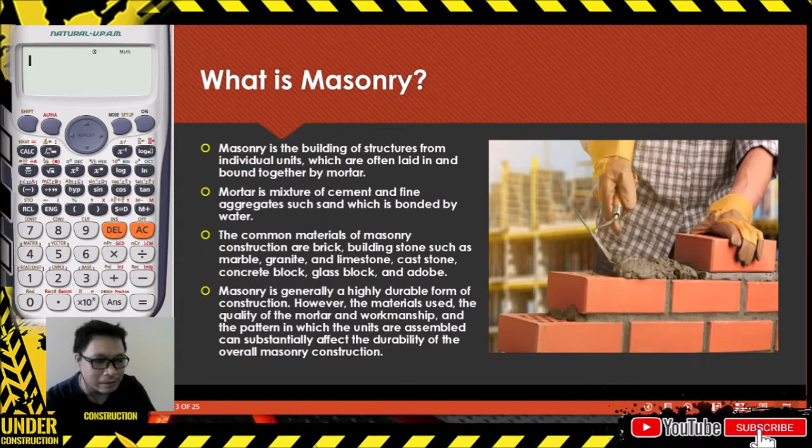Next question: why use concrete hollow blocks? This is the most common masonry material unit, the concrete hollow block or CHB. Why do we use CHB? Among all the materials in masonry, only the CHB has the most advantages, making it better compared to bricks.

Bricks have a smaller dimension, and aside from that, it's harder to put reinforcement in them. If there's no reinforcement, the units don't tie up together. Unlike concrete hollow blocks, which have an opening or hollow core where we can install the reinforcement.

Since CHB or concrete hollow blocks have less weight, they are lighter compared to other types of material. Being less weight and uniform in size, it can execute the work rapidly, so our work can be faster because it's lighter and uniform in shape. It is also possible to construct thin walls using CHB, therefore it can maximize the size of floor area.

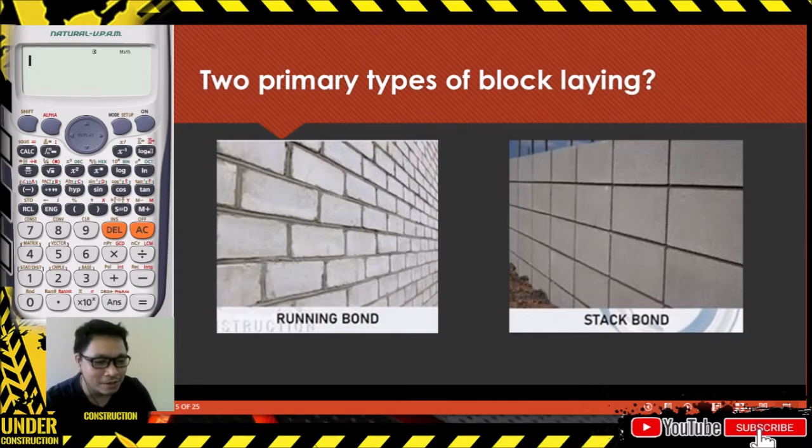Okay, so next, let's go one by one. So who takes the advantage between the two? So let's start with stack bond.

So the huge drawback of this type of layering was the strength of holding the blocks together. Okay, so from the start, stack bond already has this disadvantage.

Although when you look at it, class, it might be pleasing in the eyes, but judging the way how it reacts on load weights it carries, the block layer that is directly in contact with the said forces is the only one that reacts to it. So meaning to say, if we place a load here, class, on this pile...

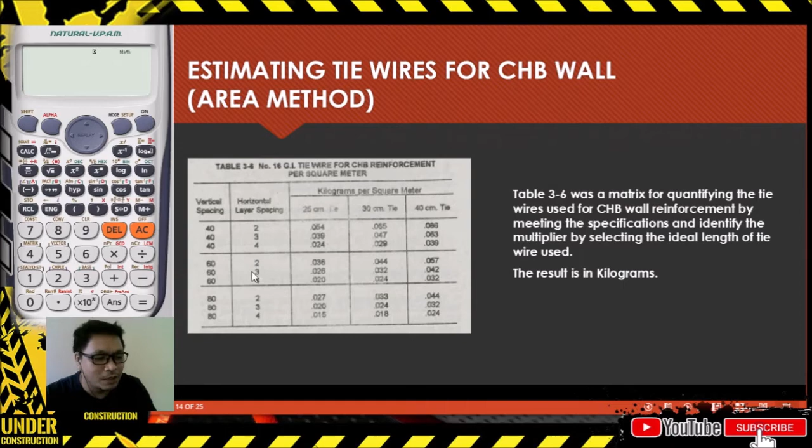So usually we use the 30 cm tie wire. So if we multiply the values of this one, you just need to specify what spacing you're using. You can customize, class, if you use 40 cm for vertical spacing, then horizontal for every 4 layers, that's fine. You'll see it here. So wherever they overlap, the multiplier changes. It doesn't mean that if it's 40 here, you use 40 everywhere. You can use 40 for vertical, then 3 layers for horizontal.

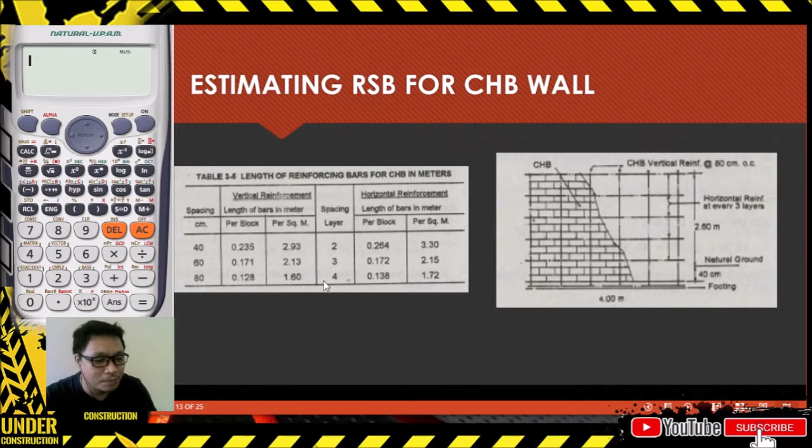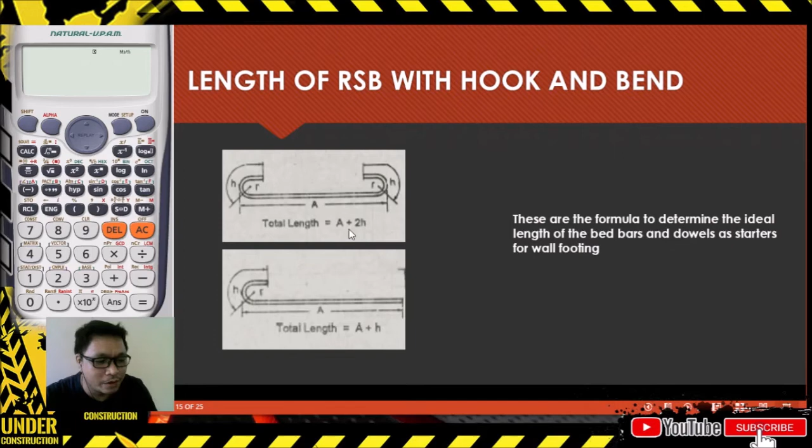Okay, 4 layers is fine. Next is we have the length of the reinforcing steel bars with hook and bend. Where do we use this? We use this for the hook or for the bed bar, for our footing. So we have A plus 2H.

Okay, now let us go with the sample, estimating masonry quantities. We have the sample structures right here. All right, we're back.

Okay, so for our sample quantity for the masonry. We have the detailed plan for the zocalo or the wall footing on the left side. Then we have a sample wall, for example, on the right side of the building. So the height is indicated, then what type of masonry it is, whether plastered or not, then we have the column, this is important, then we have the windows and the length of every column.

So calculate the quantities of masonry wall on the given side of the building using class B in all mixtures, for all types, mortar, plaster, or the concrete mixture for our footing.

Okay, next is to get the number of CHB. That's easy. So the first step is to calculate the perimeter and the area. How do we calculate the perimeter and the area? Now as you can see, in the figure we have a total of 3 plus 3, so we have 6, but we need to deduct the column.

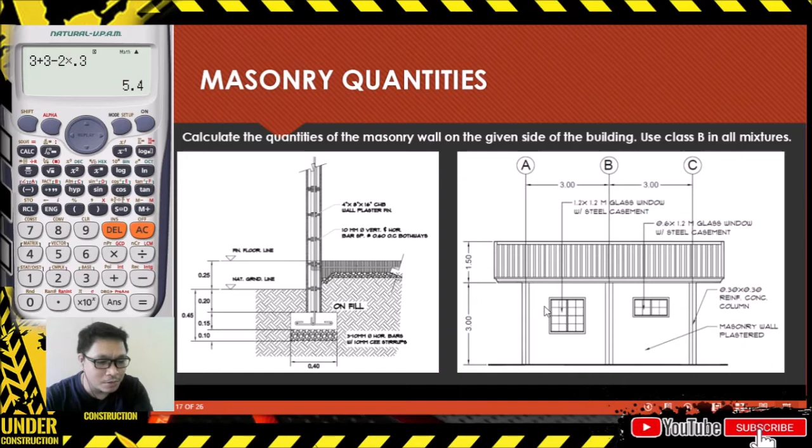Take note class that in the design of our zocalo or wall footing, the embedment is only about one hollow block, which is equivalent to 0.2. So we bury one hollow block of 0.2. That's why our masonry wall has an additional 0.2 at the bottom. So that makes 5.4 times 3 plus 0.2.

Okay, the 0.2 is like the foundation depth. Now we deduct what needs to be deducted. We deduct the size of our window, since we can't place hollow blocks where the window is. So we deduct 1.2 by 1.2, then another window which is 0.6 by 1.2. So we have a total area of 15.12.

Okay, so in this class, for your plan, you need to compute the entire area of your masonry wall. Then, as we know, we use a multiplier to compute this, so we have per square meter 12.5 pieces of CHB.

So we have an area of 15.12, multiply this by 12.5. So the result is 189, or 190. We round this up, adding a margin, rounding up by tenths.

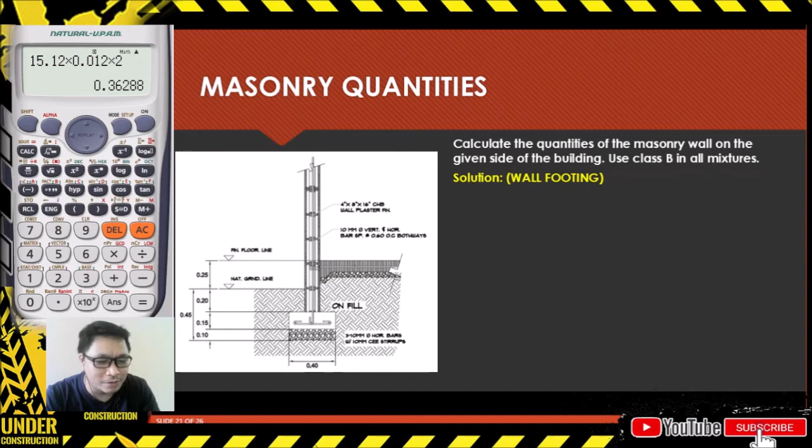For the wall footing, what we need to compute the mixture is the perimeter, the actual length of the wall. So we have 5.4.

So we refer to our table, which is table 2.5, using class B, since class B is our mixture for all of this.

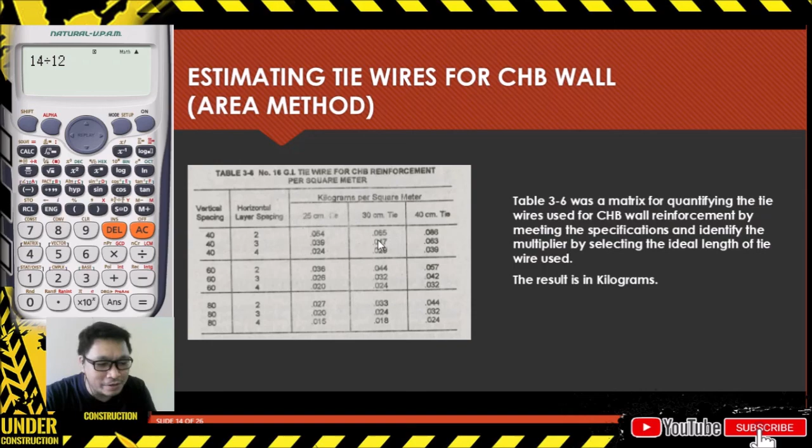So based on the table, table 3-6, number 16 GI wire per square meter. So what we're using is 30 centimeters, then our spacing for vertical is 40, then horizontal spacing is 2. So our multiplier is 0.065.

And that is at 15.12 times 0.065. And the number of kilograms we will use is 0.98 kilograms or 1 kilogram of number 16 GI wire. So what are the total quantities? Note: 40cm spacing for vertical and 2 blocks for horizontal, that's the reference for getting the multiplier of the GI wire.

So what are now the total quantities for the masonry wall? We have 190 pieces of 10 by 20 by 40 CHB, with 16 bags of cement, 1.18 cubic meter of sand, 0.32 cubic meter of gravel, then 21 pieces of 10mm RSB.

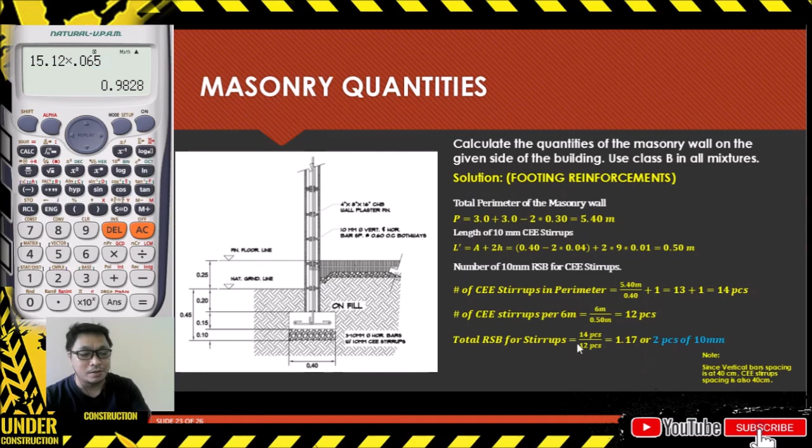So where did the 21 pieces come from? We have three pieces of 10mm: for our horizontal bar for the footing, we have 2 pieces of 10mm for the stirrups, and for the wall reinforcement which is 16. So 16 plus 2 plus 3, 16 plus 5, so that is 21.

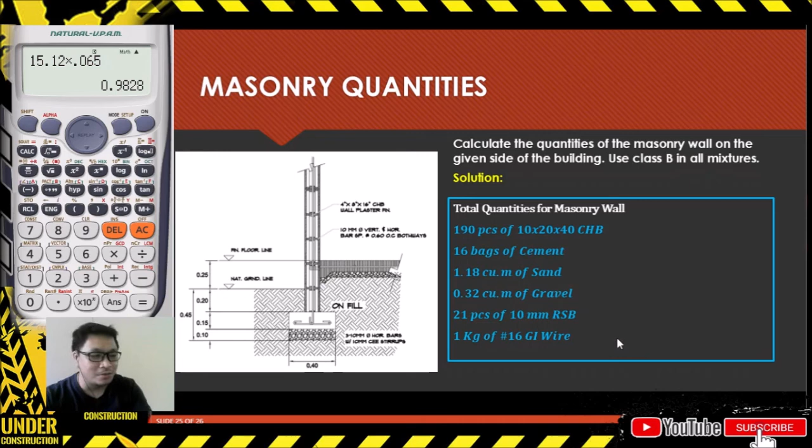Then we have 1 kilogram of number 16 GI wire. So that ends chapter 3, known as the quantity for the masonry.